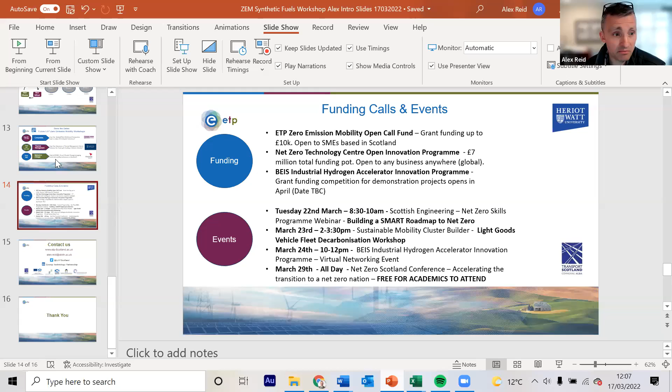So what I'll do just to begin with, if you just bear with me for 2 secs, is just bring up my screen so that you can see where we're starting from today.

So today's workshop is very much focused on the role that synthetic fuels can play in helping to accelerate decarbonisation of heavy duty vehicles. And this is quite an important subject, because ultimately this path to net zero emissions in Scotland is one whereby we have to collaboratively develop strategies that enable us to decarbonise different types of vehicles. And heavy duty vehicles, of course, by their very nature, are slightly trickier to decarbonise based on their duty cycles. So can synthetic fuels play a role in accelerating that?

Well, the answer may be yes, but hopefully today we'll learn a bit more from Ewan and from John, our presenters, on how that is going to play out in the months and the years to come. So I think a good way of framing the journey we're on is, as Mark Twain highlighted, continuous improvement is better than delayed perfection. We have to keep working incrementally towards net zero rather than pushing stuff down the road, so to speak, and trying to develop perfect solutions.

So in terms of the running order for today, the first 30 minutes or so, we're going to focus on scene setting presentations, which we'll introduce shortly. Then we've got breakout sessions, which will last for 35 minutes, and I'll explain a bit more about how they're going to work as well. And then we'll have a brief amount of time to feedback on those breakout sessions, and then a little bit of wrap-up time, where I'll signpost some upcoming relevant events and funding that may be of interest to you.

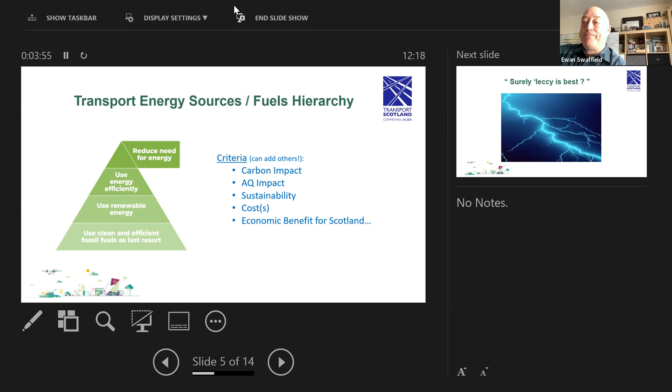A bit facetious, but this is a refrain I often hear, and it's fair to say that we in Transport Scotland have a preferred route of electrification of transport energy demand wherever that is going to be feasible. Generally, that can deliver the greatest benefits for emissions, for efficiency, and for improved human interaction with the transport mode, and also most effectively harness Scotland's huge renewable energy resources from one sector into another. So next slide, please, Alex.

But what about where electrification isn't a feasible option, either now or in the medium-term future? Well, that's where the wide world of our low-carbon fuel policy comes in, and it is a very wide world, from the established commercial options in the marketplace right now, well understood, to seemingly exotic wonder products that often make headlines, but are still actually in a laboratory stage and perhaps will never make it into the so-called real world.

Next slide, please. There's definitely a lot to consider with alternative fuel options, which can hugely affect their desirability and their effectiveness. And if not thought through thoroughly, it can be very confusing. So here are some of the main issues as we see them in Transport Scotland that we need to consider when thinking about low carbon fuels. Next slide, please.

What, firstly, are the actual carbon reduction benefits? What's the evidence for those? What are the air quality benefits? Are those benefits in tailpipe or are they in life cycle emission costs? There's pros and cons to think about on liquid versus gaseous fuels.

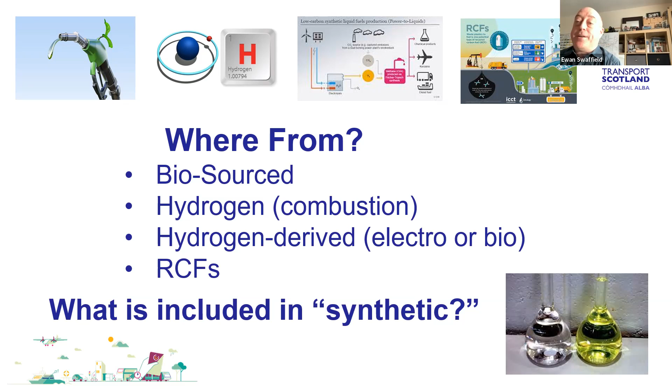And whether it's being used as a combustion fuel in its own right, or to become a feedstock for hydrogen derived fuels. And fuels in the fairly new category that DFT are defining more clearly of RCFs, or recycled carbon fuels. And given the title for our event, I think it would be interesting to hear opinions today on how wide the remit of the term synthetic fuel should be, because all of the above fuel types are synthesized in some way, but I understand from the slide earlier that we are going to be trying to more tightly define what we're talking about when we speak of synthetic fuels. I don't really want to get hung up on the language, but it's really helpful if we have common understanding of terms that we can share and then build upon that.

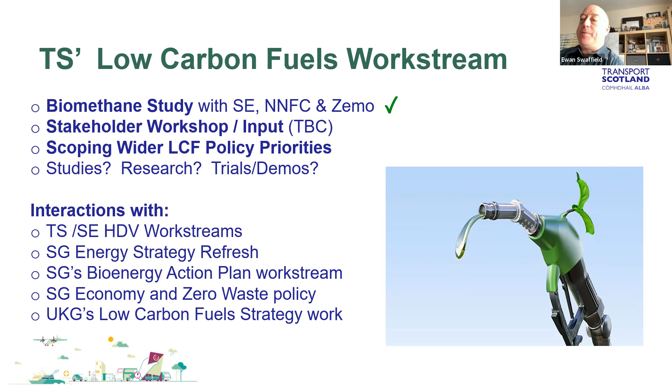Thanks. So we're very keen to have input from stakeholders, lots of ways we can interact and engage, but we really need input to scope out the future programme and to help us make the most effective policy via some of the routes I've put on the slide there.

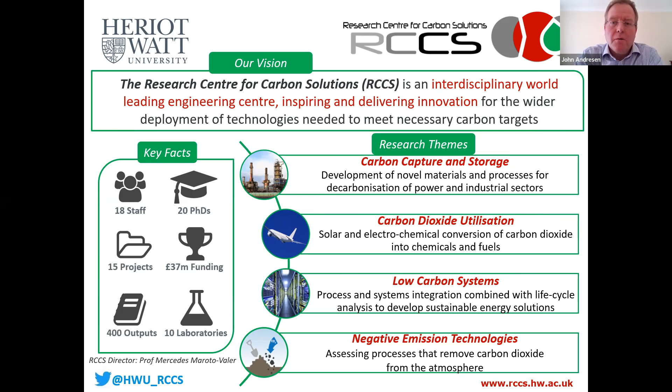The second part is that I'm a co-investigator for the Industrial Decarbonisation Research and Innovation Centre. We have about 20 million in funding with about 10 million match from industry, and heavy duty vehicles for transport within the industrial sector are very important for them. So they're looking at synthetic fuel or e-fuel as one of the ways to decarbonise. As Ewan mentioned, you need the fuel, but you also need different solutions you can integrate. It needs to be aligned with policy, and skills need to be available so people know how to utilise the decarbonisation options. We work for IDRIC to do that.

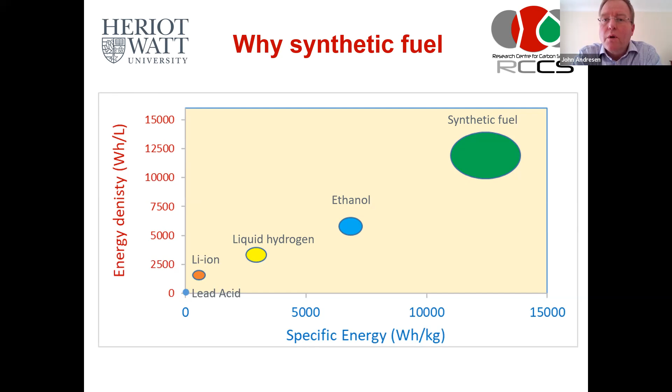Not only can you use existing vehicles that you have today, the storage density is really, really nice. If you can get the carbon footprint down to zero or even negative, that'd be great. And storage is not an issue, and people know how to handle synthetic fuel, so we can just replace the fossil fuel that you have with synthetic fuel.

So different ways that people have been doing it so far, and this is just taken from a roadmap to showcase a little bit what Ewan was saying as well, the complexity of the whole thing and different options that people have, and it can be quite confusing sometimes. You can use fossil fuel directly to make synthetic fuels. You can hydrotreat different bio leftovers, and this is municipal solid waste, for example.

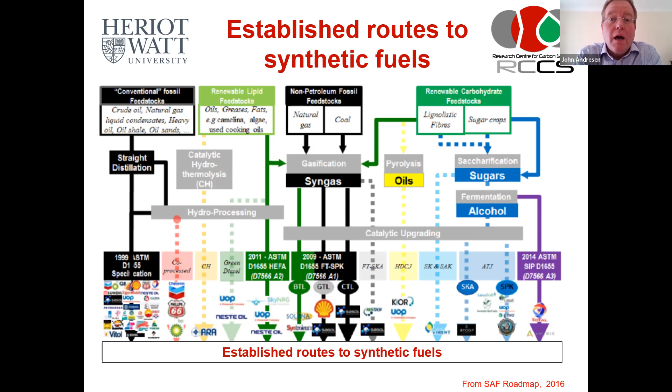One key aspect there is in the middle saying syngas or synthesis gas. We're going to touch into that. So synthesis gas is probably the key technology to take forward in terms of making e-fuel. And that is a well-established technology, and we know that very well. It's more from a techno-economic standpoint that we want to get that in. So if we can get the price of hydrogen down and the price of power down, then the syngas option will become very viable to make synthetic fuels.

One way to do that is biofuels that we touched into, which is not synthetic fuel, but they are quite good. So if you can use biofuels as a source of the energy for synthetic fuel, that might be one way to go forward. And we have been doing that at Heriot-Watt. You can start using different byproducts, like municipal solid waste where you take a gate fee, then you actually get the feedstock cost down. And there are several demonstrators within the UK looking at municipal solid waste into sustainable fuels. The nice thing is the feedstock costs are quite low. You go into a circular economy approach, which is great. However, the process cost is significant on that.

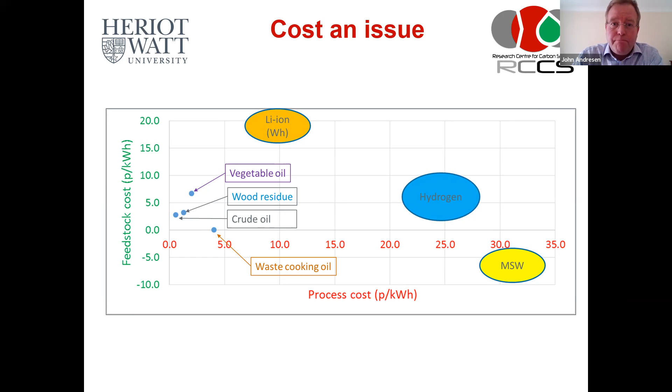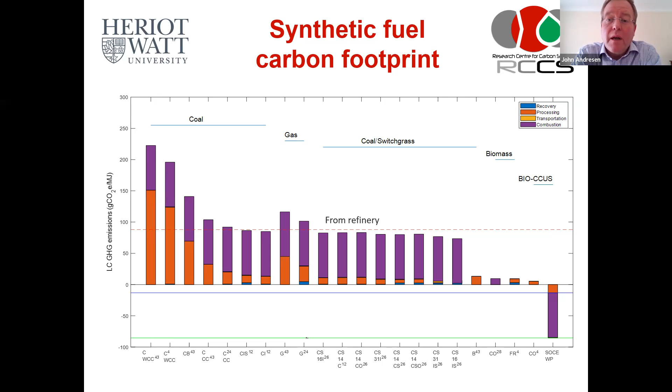What we have been trying to push is more and more biomass, so going towards the right in that figure. And as you see, the more you mix in biomass, the carbon footprint goes down compared with refinery, but still quite high, taking into consideration fertilizer cost and transportation cost of the biomass. The only way forward is if you start looking into carbon capture with utilization, and you can see there you can become carbon negative. The nice thing is the UK, especially through these processes, is looking into that. So we can get synthetic fuels linked up with carbon capture and storage, and we can get carbon neutral or even carbon negative. So that's a very nice way to go forward.

So how can we do that then? In Heriot-Watt, we have been putting forward something called co-electrolysis. Basically, that is taking steam and CO2. The CO2 can come from different processes. It's very important that the life cycle footprint or the carbon footprint of the CO2 is low. We're working with direct air capture, so taking the CO2 from the air. You can get the CO2 linked in with utilization as well.

Now the co-electrolysis is then converting the water and the carbon dioxide into pure oxygen on one electrode, and synthesis gas, which is carbon monoxide and hydrogen, on the other side. And then the carbon monoxide and hydrogen is used forward to synthesize the green e-fuel. So that will be the synthetic fuel. So it's very important there to find out where you can get the CO2 from, and also drive down the cost of the hydrogen, because the hydrogen might be an issue when you do co-electrolysis.

So we have been putting forward a waste biomass conversion using the spare oxygen from the co-electrolysis, so that we can get an extra amount of hydrogen from that, and we can get some heat for the process as well to drive down the overall carbon footprint of the process. The overall conversion of carbon monoxide and hydrogen into e-fuels is not a new process. There's about 20 companies throughout Europe that are looking into e-fuels and synthetic fuels.

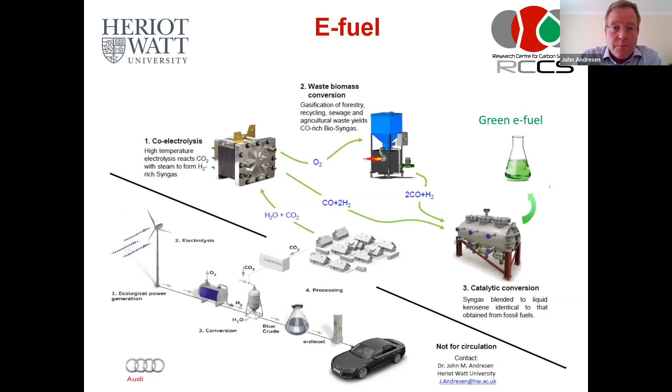Just to make sure, the current position is around 5 gigawatts worth of wind. Obviously, the Scottish government is pushing very strongly to get up to around 40 gigawatts by 2030, and the ScotWind auction of about 25 gigawatts was very encouraging. Just to note that Scotland has probably the largest wind potential in Europe, with a potential of about 260 million tons of e-fuel. So Scotland has the potential to become a major player in e-fuel and supply Europe with carbon neutral or carbon negative fuel that can decarbonize heavy vehicle transportation. So that was my last slide.